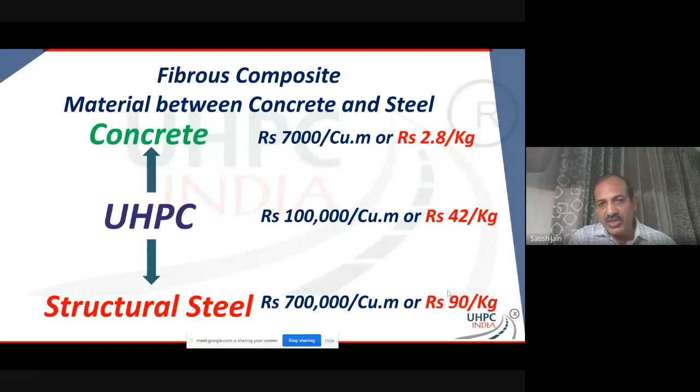So now we'll move forward because I wanted the team here present and listening to first grasp these numbers and understand them. I could have gone ahead and left it out for the last slide, or left it to just answer later on, but then the perspective is just lost. I can talk all good about UHPC, but let's bring this money perspective up front, which will allow us to see how we're going to use UHPC.

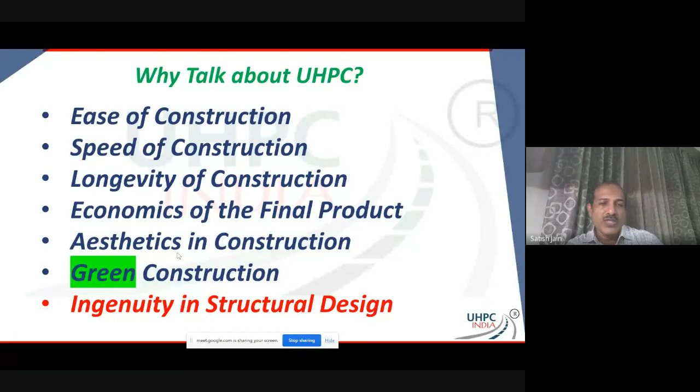So here it is - the material itself is powder, powder, powder, just a mix of powders. You're going to be using cement, you're going to be using pozzolans, something like microsilica, and you're going to be using fine sand. You are not going to be using coarse aggregate at all when it comes to construction grade UHPC, right? So it's going to be a powder material, looks very fine, plus a huge amount of steel fibers.

So the steel fibers are going to be about 2% by volume, and just to give it some perspective, that is about 156 kilograms a cubic meter. Look at the size of the fibers - about 0.2mm by 13mm length. So they are very, very fine, and there are lakhs and lakhs of fibers in 1 cubic meter. Another thing shown down below is, well, it flows very nicely. In fact, I have a video, and I am going to play that video for you.

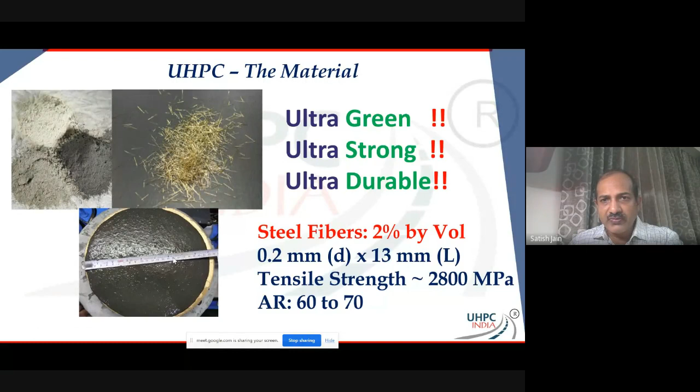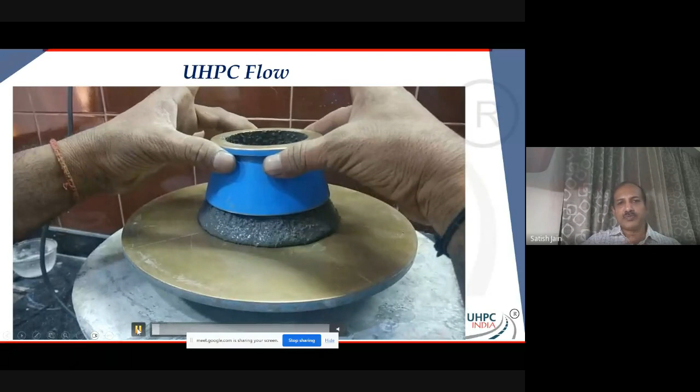So there's the video. I'm just going to tone down the volume, and I'm going to show you this. See, this is a small flow test. You're not going to use a huge cone to test out UHPC flow.

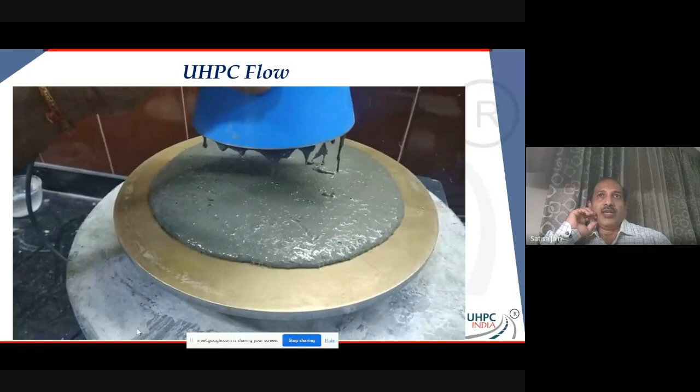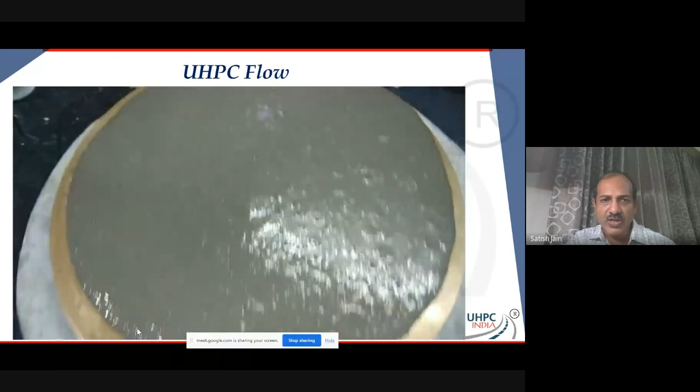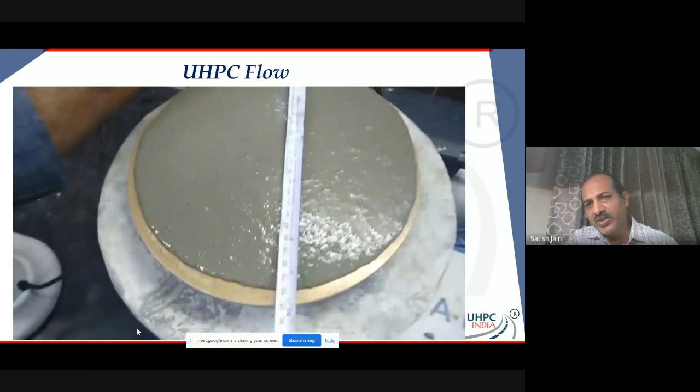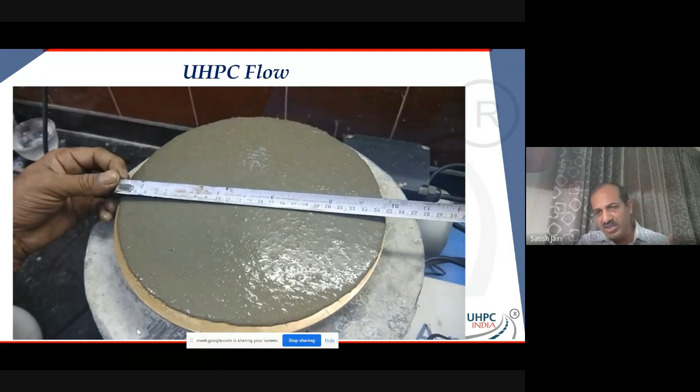There's another UHPC that is used, and we are going to come to that. That's called UHPC overlay, where you need a little bit of a thixotropic mix, which just doesn't flow off. It is workable, but just doesn't flow off. So we'll come to that.

So to give you some ideas, on the left side I'm showing comparative compressive strengths in the range of 140 to 220 MPa. Why do I limit to 220 MPa? That's in general what you're going to get. You definitely can go to 250 also. There are certain ways and means that you can achieve 350 MPa, 400 MPa, but that is outside the realm of normal use of UHPC in construction. So that's about the compressive strength.

Elastic modulus, okay, very, very high, generally 50 gigapascals or 50,000 megapascals. Third thing, low creep coefficient, about one with normal curing. Concrete has a creep coefficient of 2, whereas UHPC you can get about 1.

So what's the advantage of these three things I just spoke about? When it comes to long span, you can put a whole lot of pre-stressing in it and still keep going longer, because the more the compressive strength, the more pre-stressing you can put in. Long spans have deflection related issues - that's where the elastic modulus helps, and also the low creep helps with the long-term deflections. So this is a great recipe for doing long span structures with UHPC. You can do a lot of short span also, but it's a great recipe to put pre-stressing in as well.

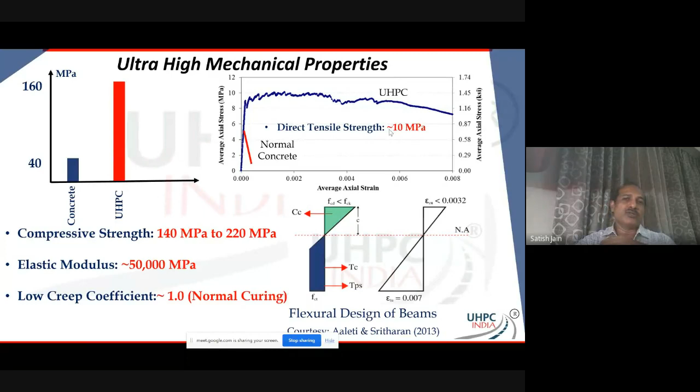Let me talk about why it is called performance. Why not just ultra high strength concrete, correct? It's called ultra high performance concrete because there are so many durability performance criteria that UHPC is great at, really great at.

Here is a quick example. Well, before I talk of the example, let's talk about longevity. We have a material here that can not only give you 100-year service life, it's possible to get 100-year maintenance-free service life. Just that changes the entire dynamics, because 100-year maintenance-free means you're not going to be spending any more money on your project. Once it's done, it's done. Yes, there's an early cost to it, probably, but over the life cycle, if it's a government bridge, nobody has to come and spend anything on it later on.

Let me compare this chart. You see this yellow line, this is concrete, and this is just a relative comparison. Green is high strength, high performance concrete. And blue, you can still see that's UHPC. That's how low the oxygen permeability is, or chloride ion penetration depth. Even water permeability is way too low. The corrosion rate is next to negligible. Carbonation depths are low. Even freeze thaw, for areas in colder regions, etc.

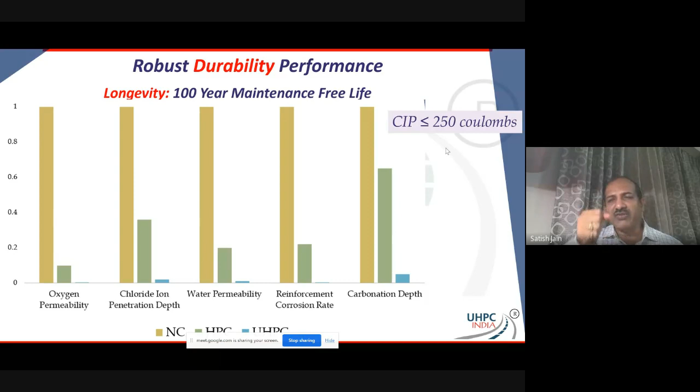And if I forget to tell you this later, concrete is brittle and explosive when you do a compression test on very, very high strength concrete. But UHPC, you no longer have that because of the presence of the steel fibers.

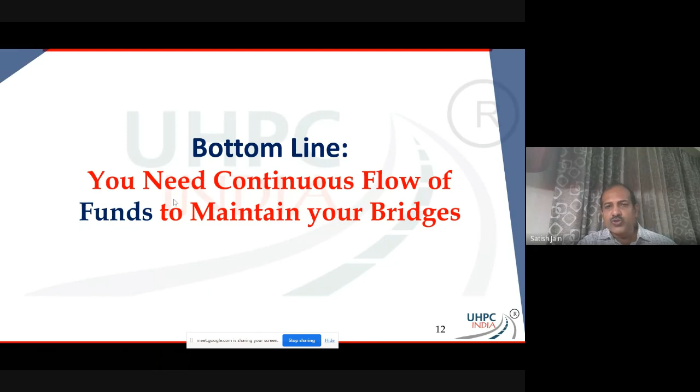What you need is a continuous flow of money to maintain your bridges. Let me give you an idea of what kind of money we are talking about in today's terms. You see, India right now has so many infrastructure projects going on. Look at this annual budget allocation for MORTH.

That number during last year was 1 lakh 18,000 crore rupees for the entire year, and that's for roads, bridges, running the entire administration, everything. Assume even 15% is going towards new bridges, that's about 17,000 or 18,000 crores, which means during the life cycle you're going to be spending twice, about 36,000 crore rupees every year. That's taxpayers' money, and that's just the MORTH budget I'm talking about.

States have their own budgets for highways and infrastructure projects. There's a huge amount of money going into rehabilitation, repair, or strengthening projects of infrastructure — the maintenance cycle I was talking about. You build something, it deteriorates, you strengthen it, it deteriorates again, you add load capacity, strengthen it more, it deteriorates again. UHPC, once you use it, is a one-time solution.

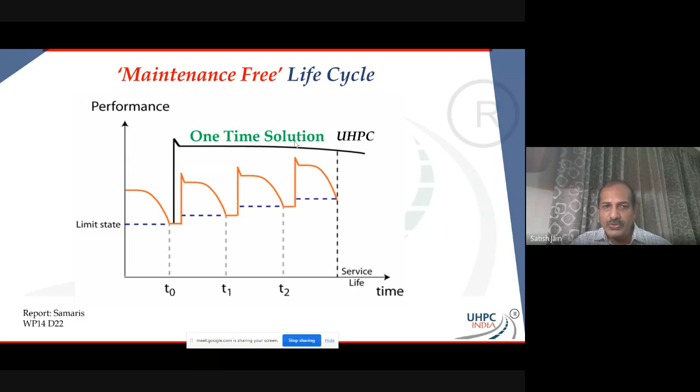As engineers, we need to understand it sometimes more than just asking for a direct cost and comparing it to regular concrete cost — UHPC delivers a lifelong solution. That's something we should keep in mind. And I was talking about architectural bridges, aesthetics in engineering, and UHPC can really deliver that.

This is a bridge in southern France, in Montpellier, and you can see such sleek columns or sleek piers coming out of UHPC. Even the girders are in UHPC. These are all precast, they just have post-tensioning within them, and it took just 4 months to complete.

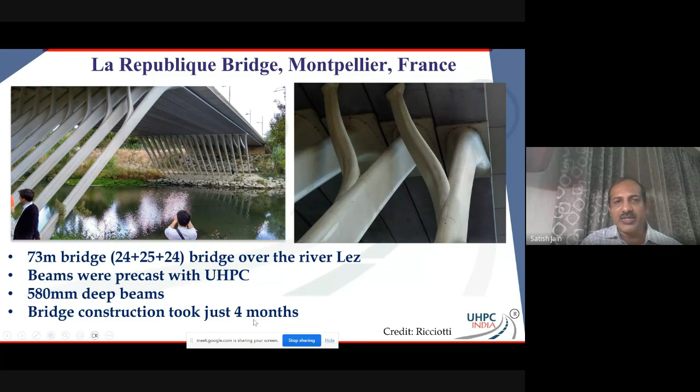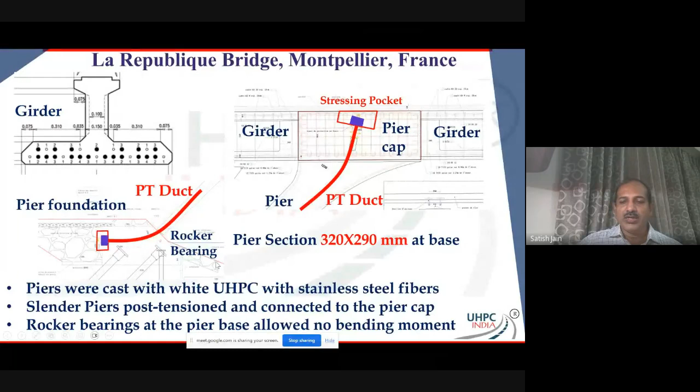The post-tensioning comes through and connects with the girder and pier cap. On the left side, that's how the girder looks — a nice inverted T girder connecting with the slab above. Right at the pier foundation, all you have is a rocker bearing connection. Simple, straightforward solutions that can be brought about with UHPC, and a beautiful solution as well.

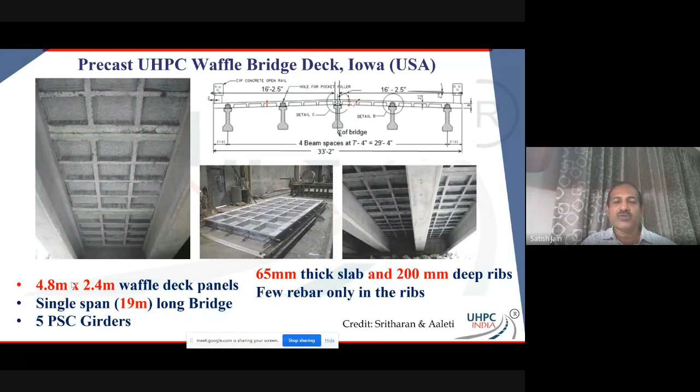Imagine, going back over here, how much lighter this is compared to your conventional 250 to 280 to 300 thick deck slabs that you're putting on top of your bridges. The reduction in weight is just about one third — it's just one third the weight of a typical deck. Your seismic weights come down in your construction, and one really has to think about those kinds of things if you're going to come up with sleeker solutions.

And while I talk about joints, let me tell you it's not just infrastructure — we can talk about buildings as well. This is of course a bridge project, and they have these precast decks on the right side where my mouse is. These are precast concrete decks, but they're all jointed together or stitched together using UHPC.

And UHPC is so strong that this joint is far superior to your parent element. You can see the face of the joint — on the left-hand side, you can see what a conventional joint would look like versus what a UHPC joint would look like.

The UHPC joints are sleeker just because of the robust characteristics of the material. To give you a general example, your bond strength between concrete and rebar needs about 40 to 50 times the diameter of rebar to develop it. In UHPC, you just need 15 times the bar diameter. That's how good the bond strength is, and so you get sleeker joints. You can come up with completely new construction techniques.

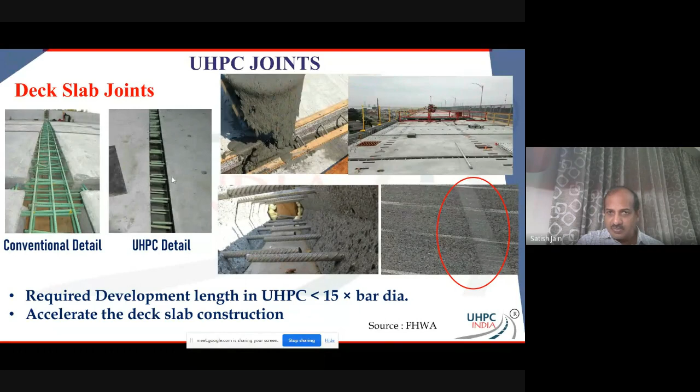Same thing with UHPC, prefab girders. How many times do we see that there are possibilities? There are possibilities. I'm not saying it can be done in every situation, but there are possibilities that certain segmental bridges could be converted, where a span could be divided into maybe 3 segments instead of having n number of segments. It's possible. Not every time, but it's possible.

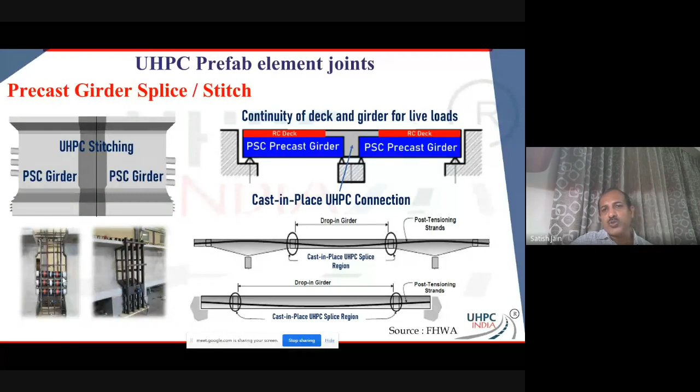And that's where you can again have a sleeker joint and use UHPC to join. And believe me, this has been seismically tested with cyclic loadings. Missouri S&T, a university in the US in the state of Missouri, is where full-scale testing of UHPC stitch joints have been done. So again, faster construction, less falsework, you can keep moving ahead. That's the beauty of UHPC.

Expansion joints - how many times do you have expansion joints? You need to have them. But water leaking through it, what's the problem? Everything rots. And what do you have at the end of the day? Your bearings deteriorate faster, and you need a maintenance solution.

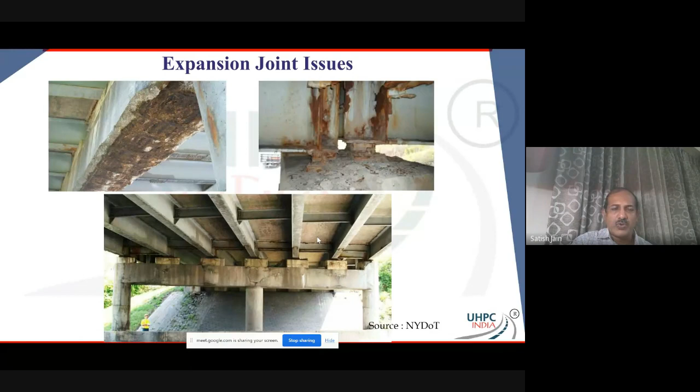So there's a great solution with UHPC. On the left side you see a conventional expansion joint. In the middle is a UHPC link slab, and what you will see is the lateral expansion is moved from the top to the bottom at the bearings, and the rotation that happens at the bearings is moved to the top, where the UHPC is - a little link slab that is put, partial jointed. That's where UHPC is put, so that's where the rotation happens.

UHPC has great ductility, so it has rotational capacity. So now you can appreciate the fact that there is no moisture or water penetration that can happen through your expansion joint. We are not saying we are eliminating the expansion joint, we are just interchanging the mechanisms of rotation and translation by changing their locations. But then we are avoiding the water ingress. It's a very simple thing that can be done on projects.

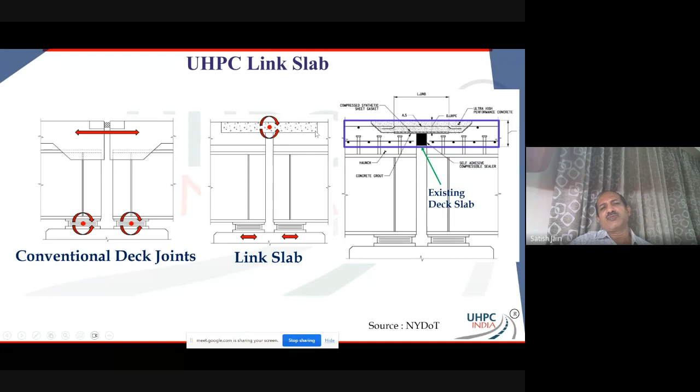Rapid strength gain - just to bring this to perspective, there's no one kind of UHPC. You can make several kinds, but one of the most common that gets sold has rapid strength development: in one day you get about 50 MPa plus, in 3 days you get 90 to 100 MPa, and there's so much you can do with that rapid strength development. You can open up traffic faster, get things moving really good. Bonding - excellent bonding, already spoke about it. Crack resistant, and of course strength - we already talked about it.

Advantages of using UHPC as a joint fill material, prefab elements again. This was one slide I was mentioning earlier, I will show it again. This is precast piles, happening a bit in Canada and US. UHPC precast piles are going down. I want to show you just one thing.

A UHPC precast pile weighs about 61 pounds per foot, whereas a steel pile is about 57 pounds. And believe me, steel H piles are preferred in the Midwest or central region of the US - they're just way faster. But the weights are so close together. And what did I tell you about the cost? UHPC is half as costly per kilogram than structural steel. You see how much you could be saving now? Tremendous. Of course you're not saving 50% - you need formwork for your pile, you need to add some pre-stressing, etc. But definitely you can save about 20-25%. You are going to be saving.

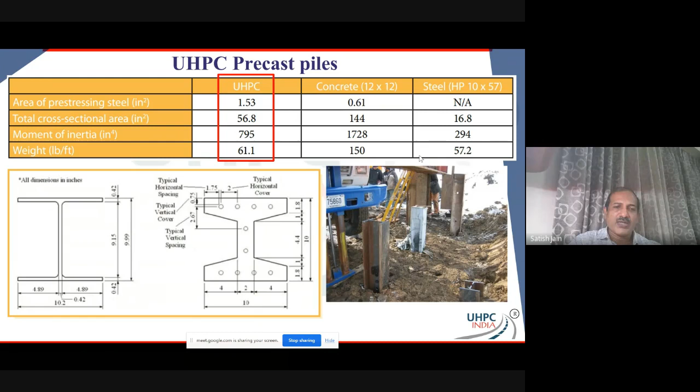That's a benefit that you bring about. Amazing UHPC. India, unfortunately, is a huge market for repair and strengthening. I say unfortunately because things are not lasting. Bridges are built for 80, 100 years and are falling apart in 15 years. You have to go ahead and strengthen them up. Similar is the case with buildings, unfortunately. So UHPC can come as a great boon, a great material for repair and rehab.

So the first example I'll talk about is this slide showing UHPC, also called UHPFRC, ultra high performance fiber reinforced composite or fiber reinforced concrete. On the left side, a simple layer, maybe about 40mm, of UHPC is put over the top of a bridge deck. This can be put on new decks, or existing decks. Once you do that, you're not only arresting moisture intrusion and safeguarding the concrete below, but the material itself is so highly abrasion resistant that you may not need any kind of wearing coat. That's the beauty of UHPC.

This is a very general example. You see it's a nice roughening process. I'll talk about the roughening process a bit, but you need a pretty good roughening process. On the right side, you may or may not require rebar, but this is a typical strengthening project where even rebar has been put. I think the left side was about 30mm in this project, and the right side was about 50mm or so of UHPC. This is reinforced UHPC used for strengthening one of the bridges in Switzerland.

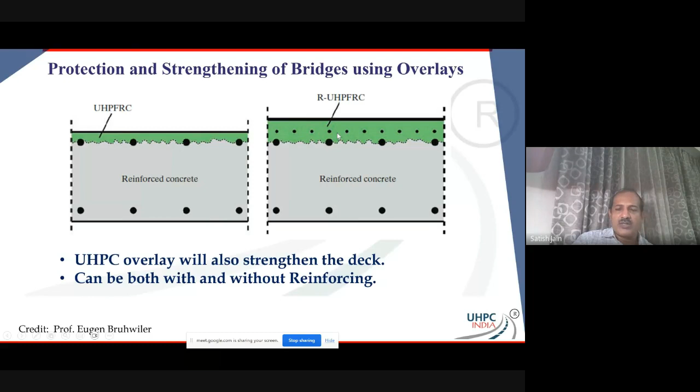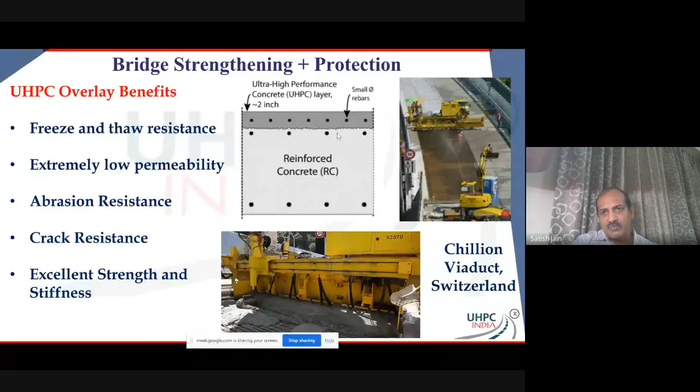It's a viaduct in Switzerland, the Chillon viaduct, where a couple of inches of UHPC was put in. So you get advantages in terms of freeze and thaw resistance, very low permeability, abrasion resistance, crack resistance, and excellent strength and stiffness. You name it, it's there. You just get excellent behavior throughout the life cycle.

Here is something that I saw in person. This was in 2019 in Albany, New York. UHPC is just mixed on site in a bit of a high energy pan mixer. So it's not just a simple pan mixer, there's a bit of a high energy pan mixer that they've used.

See the roughening process, this underlying concrete was roughened so nicely. You could use hydrodemolition, or a combination of milling and hydrodemolition. But you need a good roughened surface for good bonding purposes. This was a simple project, so a very simple truss screed vibrator was used. Immediately after putting that, they are spraying a curing compound after screeding it, so that evaporation can be arrested.

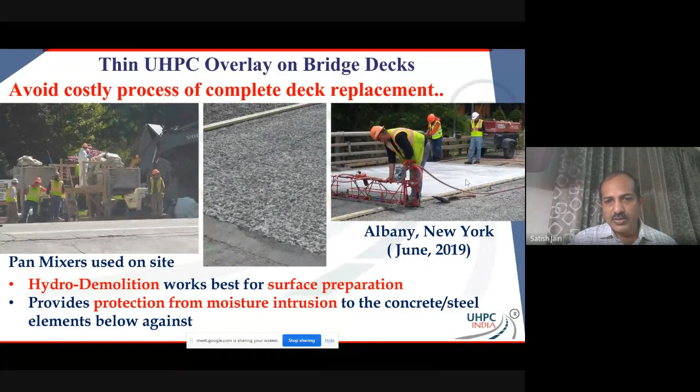I can attest to that, because UHPC as such started out in Europe, Denmark really speaking, and then the French took over, made a lot of UHPC, spread it around the world. It came to US and Canada, and of course Europe, Germany, Switzerland and other countries were using it. On the other side of the world, Japan picked up very nicely, Australia picked up, Malaysia picked up, China being one of the last countries, maybe about 7-8 years ago they picked up. Today China is the biggest both manufacturer and also the biggest user of UHPC combined, everybody in the world. That's how fast they've grown in the use of UHPC.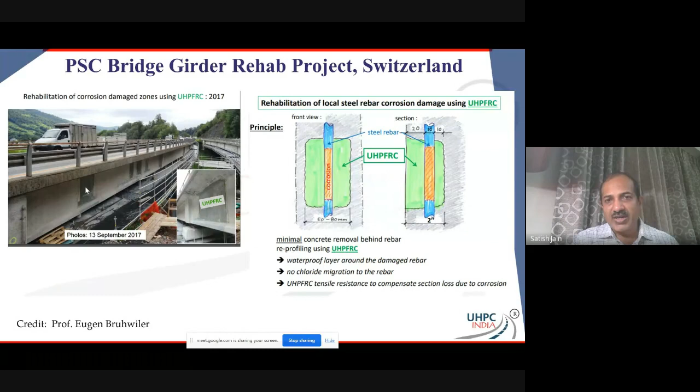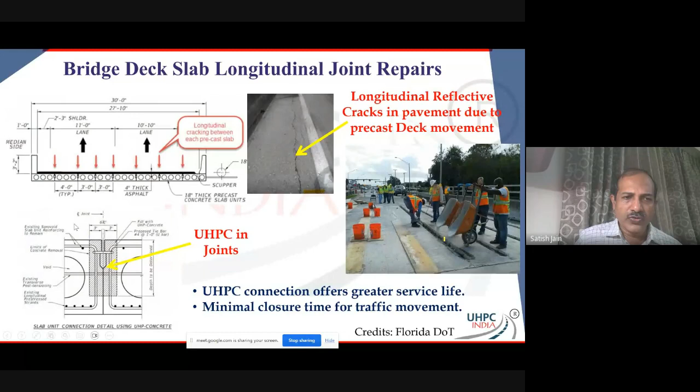More repair examples: these are precast segments placed right next to each other for a deck, with a wearing coat on top. Moisture intrusion through that coat started creating problems to the concrete below. All they did was open up these joints, as you can see on the right hand side, and poured UHPC into them. A simple solution. This was in Florida.

This is a Venezuelan project where marine piles were repaired using UHPC, just a jacket around them, called it good.

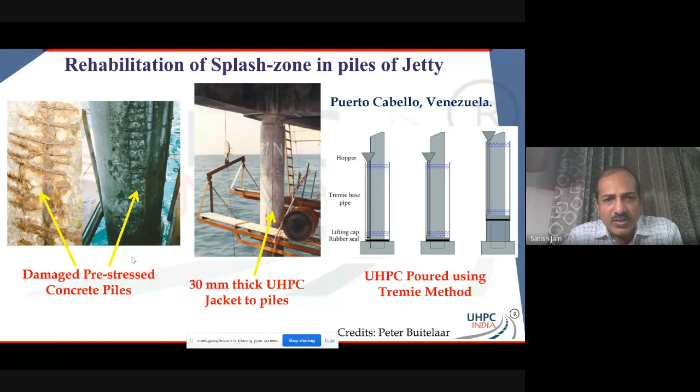This is Canada, where they used UHPC for a 100mm cover on a railway bridge. In fact, there's another example of a railway bridge in Canada where they did seismic jacketing, seismic strengthening.

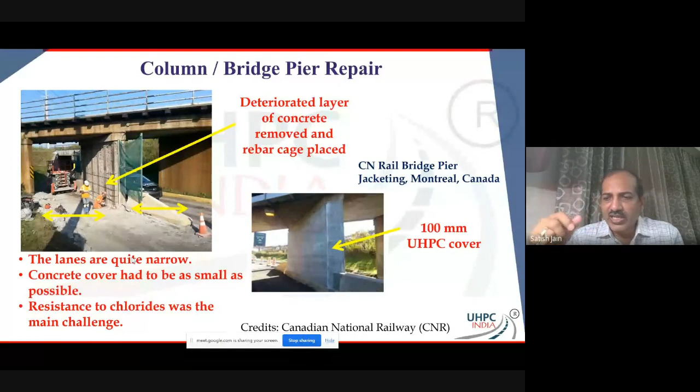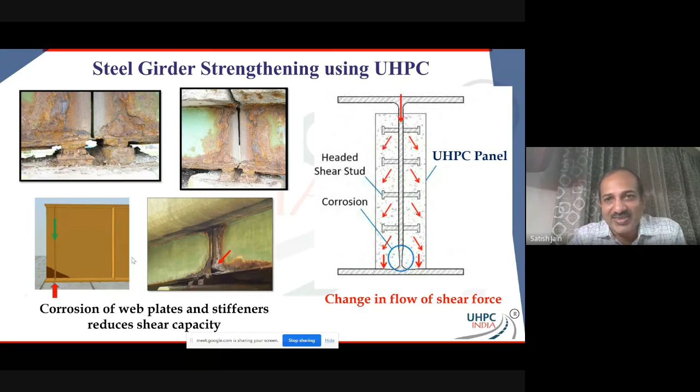You can increase punching shear capacities in slabs if there's reason to believe your flat slab isn't designed for punching shear, or needs additional strength. UHPC could be used to enhance it quite a bit. Steel girder strengthening could also be done by putting some UHPC at the ends, to take care of corroded portions.

One quick use of UHPC: let's say you have a normal concrete U girder with some poor consolidation or issue. This is again from Florida. You put UHPC in that area, and in a single day you get your 50-60 MPa. You're good to go, so it can be erected. There's no time lag - you're probably losing at max a day, but then things can be taken care of.

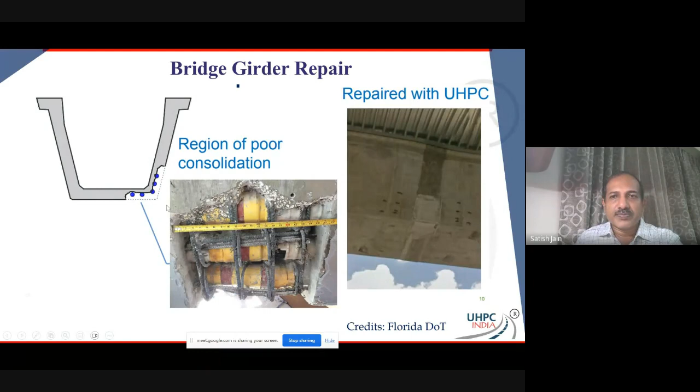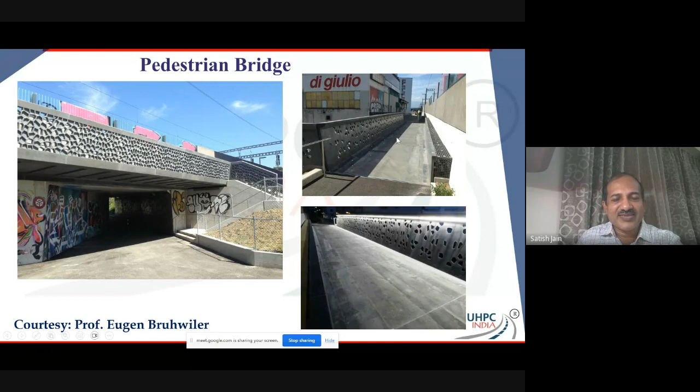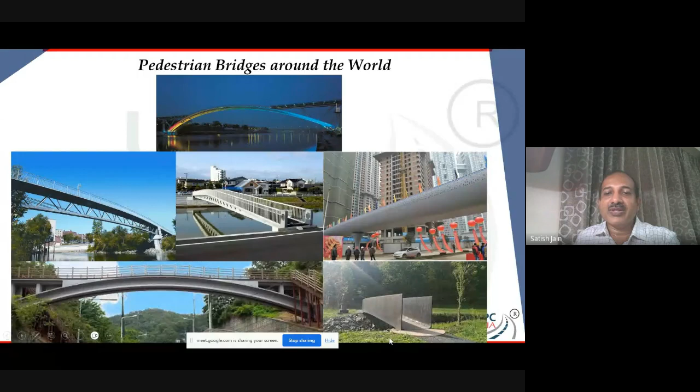It's pedestrian work, a different kind of work. This one is in Switzerland. More pedestrian bridges around the world, but let me tell you, if you go to the bottom right, that's one of my favorites. It's simple, just looks like a bent steel plate - that's what it looks like. You can come up with really nice and thin pedestrian bridges as well.

So we spoke about design shear strength - excellent, at least 10 MPa. Without rebar, you get 10 MPa design shear strength, so that's an amazing thing. Most of the time, for the girders you'll be doing, 90% of the time you're not going to be using any shear rebar. There may be some right at the ends, but otherwise you won't need it.

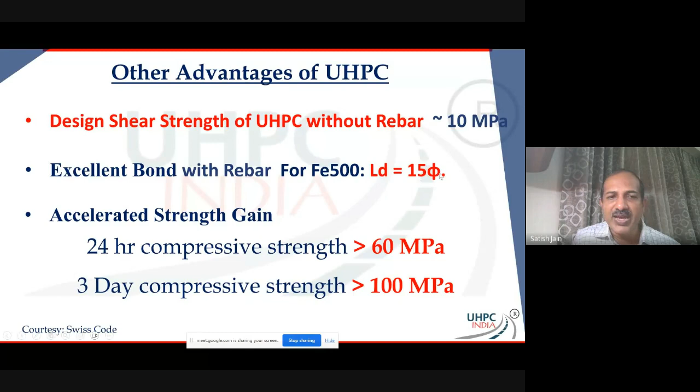We already spoke about the bond strength, which gives a development length of just about 15 times the diameter. We also spoke about 24-hour and 3-day strengths.

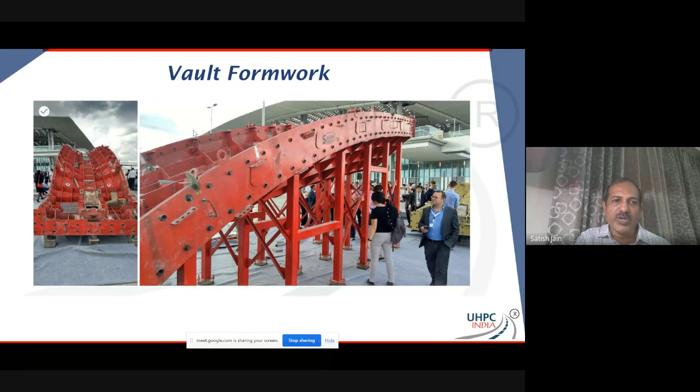I'm going to show you some architectural masterpieces as well. This is a railway station in Montpellier, France - very nice, you can see long cantilevers. That entire roof is made of UHPC, all precast UHPC pieces. That's the formwork - beautiful formwork, wonderful work done by the engineer who made it. Nice vaults were made out of UHPC for this project.

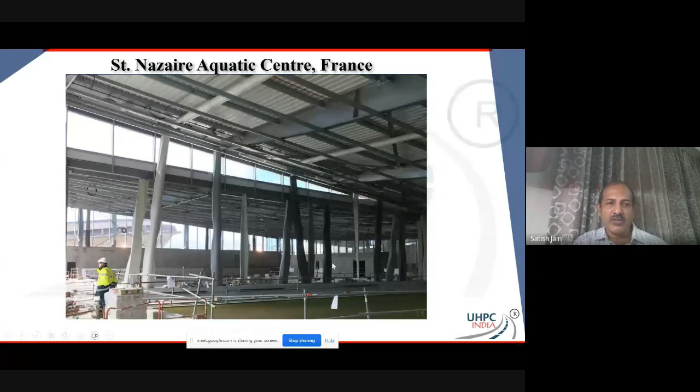Columns, designer columns - you can see all those columns standing up, very nice designer columns, all post-tensioned and connected to the steel roof and the foundation below. In this project, only the columns were made of UHPC. Nice balconies too - stepped staircases and these very nice shaped balconies that could just be brought in and fixed to the project.

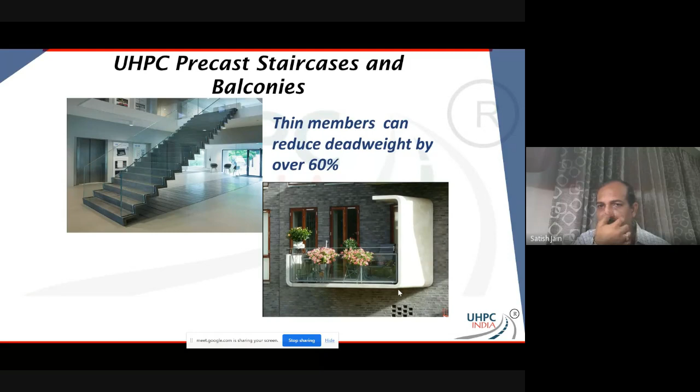It was just wonderful. So, a few things, we want to talk about busting myths. There's a lot of wrong information spreading around, and I think we should shed some light on it. Number one, okay.

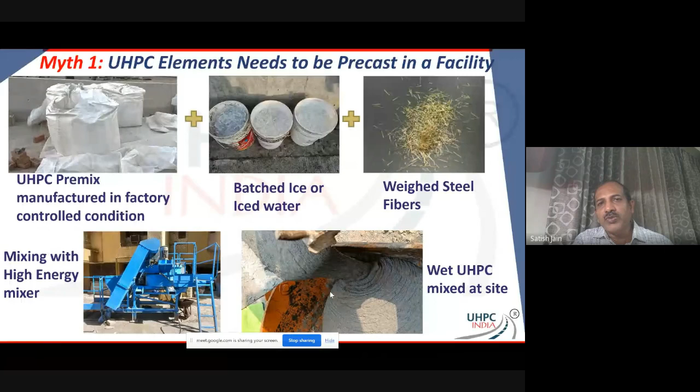I hear people saying that UHPC can only be done in a precast facility. Oh no, 90% of the work around the world with UHPC is done on the site, and it's just made on the site. You probably have UHPC premixes coming in, small bags, big bags, whatever. You're going to have an ice batcher, or you can just weigh your ice, steel fibers, and some kind of a decent mixer. You can mix on site, you can pour it on site. That's how easy it is. So no, it's not necessary that UHPC elements have to be precast off-site. You can even precast it on site.

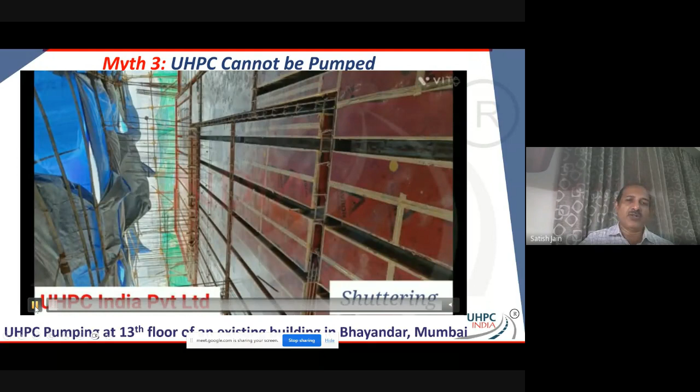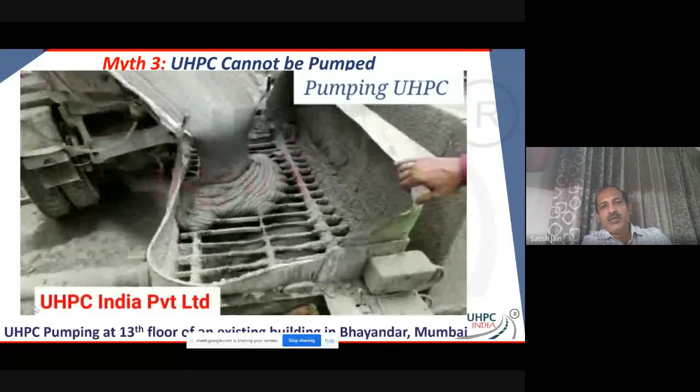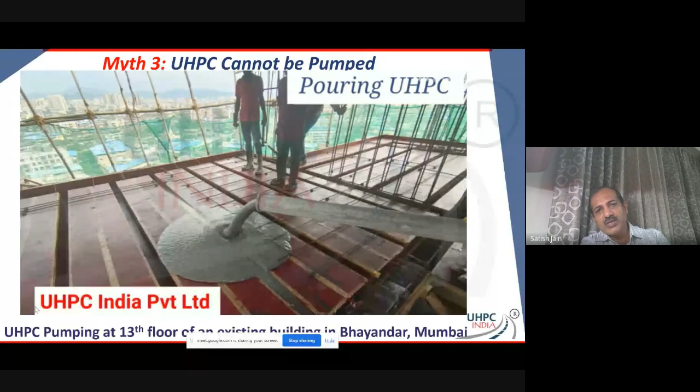And I'm going to show you a video over here where UHPC has been pumped. This is a joisted, ribbed deck on the 13th and 14th level on top of a building in Mumbai. These floors were added. UHPC here was actually mixed in a transit mixer, not coming out from a plant. The bags were put in, it was mixed, and it just flows out very nicely into a pump, and you see it has come out. You can see that in the video over here.

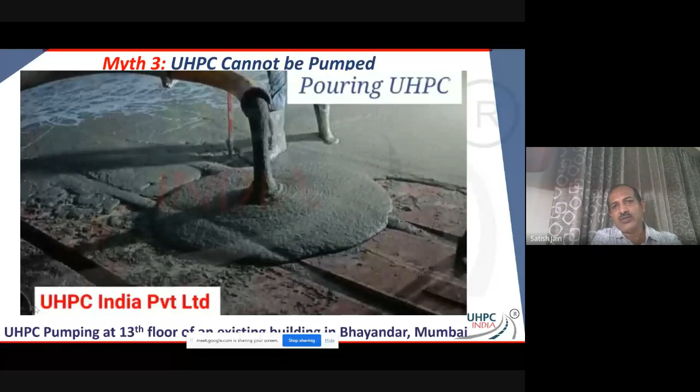The temperatures are low, about 25, 26 degrees Celsius. It's just so nicely coming out. You can imagine this UHPC has a huge amount of steel fibers in it, the microfine steel fibers, and it's still flowing out consistently. That's how beautiful it is. You just don't have to do anything.

Right? That's at the end of the day. Yeah.

And then there is another myth saying that UHPC has to be steam cured. Again, I'll tell you, 90%, 95% of the UHPC, there is no need to steam cure it. You can just use your normal curing, you can use your curing compound. On the left side, you see these small UHPC beams, about 8.5 meters long. For 30 days continuously UHPC was poured, about 84 beams were put together, and you can see the strength that was achieved. We took cubes every day: site mixing, normal water curing, about mean strength of 186 MPa with a standard deviation of about 8 MPa.

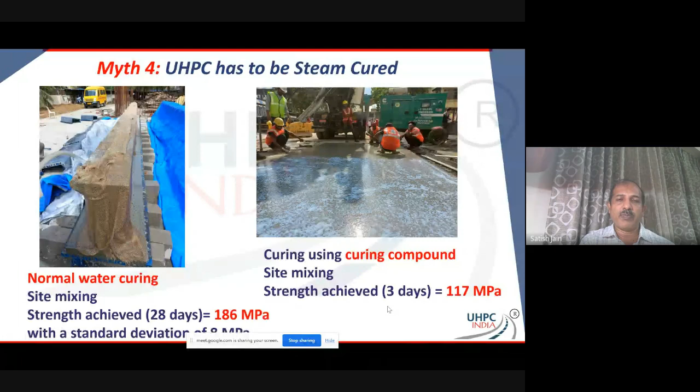And the right side material was used for a bit of an overlay near a station in Mumbai. Again, 3-day strength achieved was about 117 MPa on this particular project. So you can make UHPC.

Another myth is that you have to pour UHPC within 10 minutes, 20 minutes, 30 minutes. No. You can devise your own UHPC. You can have it workable for a long time.

Just excuse me one second, I got to put this medicine in my eye.

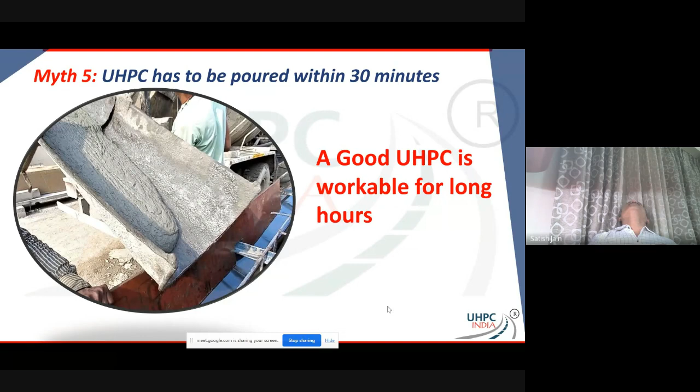And so UHPC, you just need what? You need retention admixtures. You can retain your UHPC as long as you want, 2 hours, 4 hours, 6 hours. It's up to you, what you're devising, correct? So all that's possible, all that's really possible.

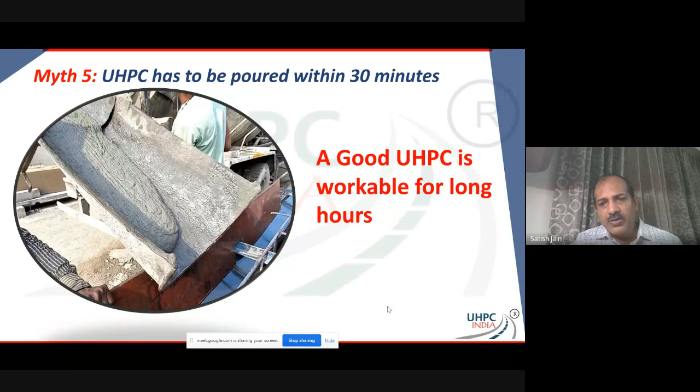So these kinds of myths or misinformation that's spread around, one has to understand that at the end of the day, it is a material. Yes, the quality control has to be high, but it is still a material which you can play with and create your own.

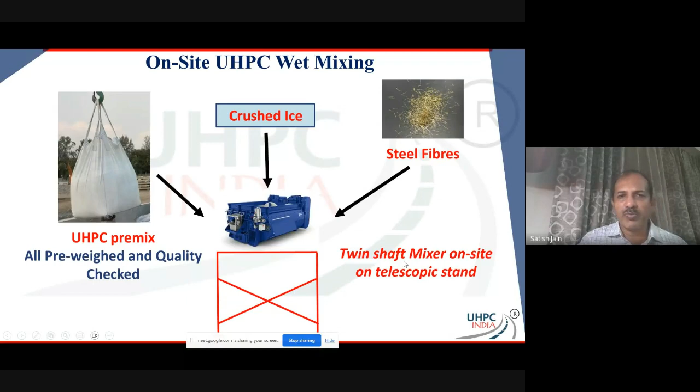On the construction side, I just want to show one little slide over here, that on a job site, if you're getting a jumbo bag, you just have a mixer that needs to be put on top of a telescopic stand. You put crushed ice on it and add the steel fibers, and then you can have a bucket down below, or a pump down below through which UHPC can be moved into wherever it needs to be placed. So on site, it could be a very, very simple mechanism. There it shows, the bucket's there, and the bucket will take it to the beam and just pour it into the beam.

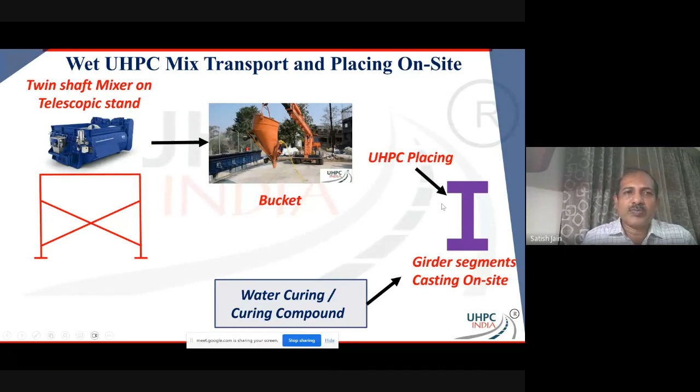So I'll just show you some other things. This project I wanted to talk to you about specifically. I showed this project up front, but let's look at what the owner wanted, what was the problem that we solved using UHPC on this project.

This was a school that was put together, and the spans were about 7 meters. There were two spans of 7 meters, total 14 meters. When it reached the top story, the owner called us and said that at the top they wanted a 14-meter span. Now it was just a 2 to 3 story building. The structural engineer said I cannot have huge spans because it will increase the load on my exterior columns, since the columns were just designed for a small building. The column doesn't have the capacity to carry a lot more, the foundations don't have the capacity to carry a lot more. And they wanted the roof to be in concrete as well, because they wanted to hold dinners and other activities at the terrace level. So it wasn't like you could just put a metal deck with a steel truss and call it good - it had to be concrete.

So we came up with an idea of this kind of inverted T, a little bit of an I-beam, very thin. This was post-tensioned, 14 meters long, and you wouldn't believe it - the total weight was down by 30% compared to the original two spans of 7 meters. The weight on the end columns came down by 30% by using this UHPC solution.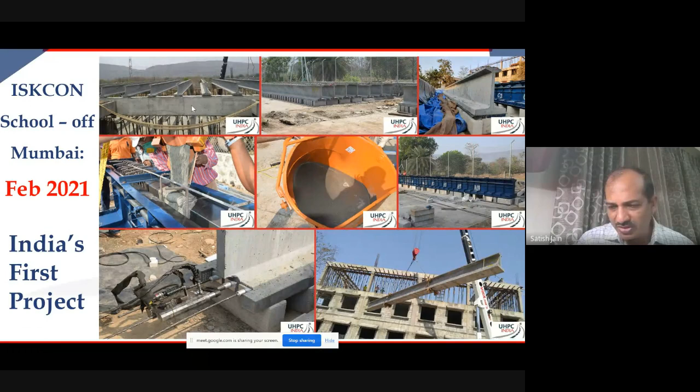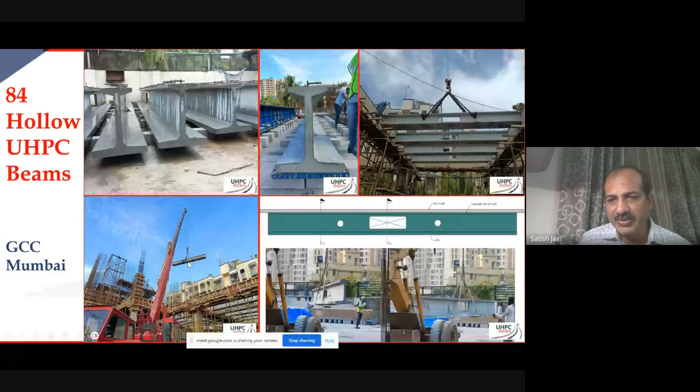There's another project wherein hollow UHPC beams were made, and that was more for the HVAC units, the heating and ventilation, air conditioning units. So there was some extra design work that went into that because of putting the openings in. Sprinkler lines were put in, and here too you can see one of the first floor beams being picked up very nicely - around 84 beams were cast for that project.

I'll just show you some of them. This is the 19-meter span. This was cast in place at the 13th level, so casting was done very easily. The UHPC in this case was just mixed, put into wheelbarrows, and through the construction lift it went all the way up. There were like 7 or 8 wheelbarrows in line, just going up, coming down, going up, coming down, poured with wheelbarrows - your regular construction means and methods.

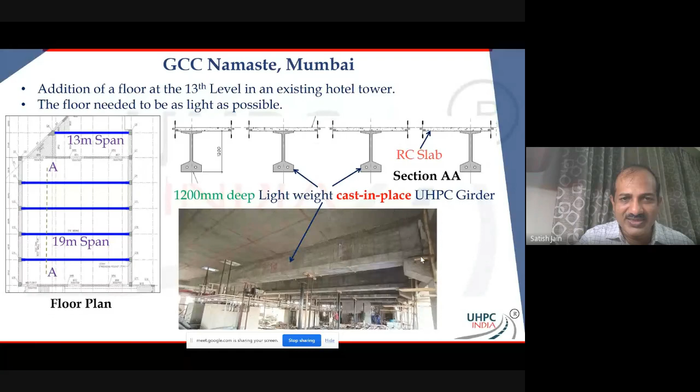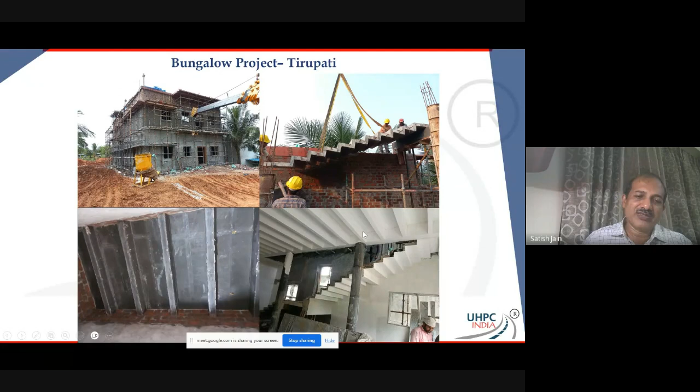I'll show you this as well. Here's a project where the owner is a hotelier, and there's a 12-story building coming up. But the first story, the ground floor, is a banquet hall, and they wanted to open it up last October, 2022, for the wedding season, and they were already late. The banquet hall has a 9-meter height - pretty high - and huge spans, 16-meter spans. So if you're going to do your regular false work, shuttering, propping, and then putting concrete and post-tensioning it up right at the top, they were not going to meet the schedule.

So we brought in a thought process. We said, what if we have precast UHPC beams, precast on your site, and also we precast the RC slabs, 4 meters by 5 meters pieces, on the ground, and then we pull them all up and put it together and stitch it together with UHPC? I'm just going to show you this and narrate it as it goes.

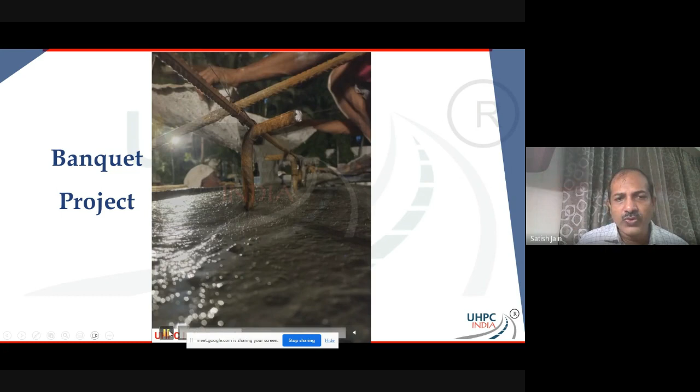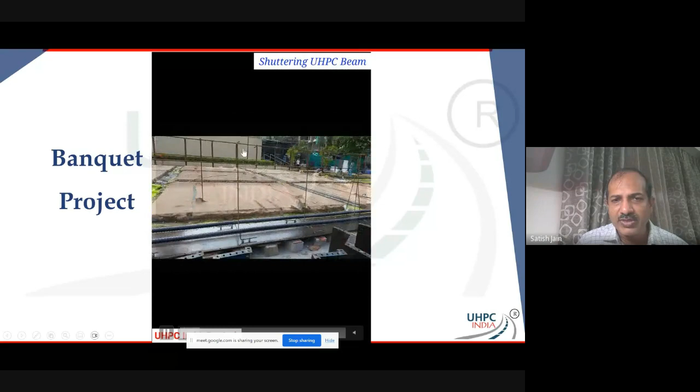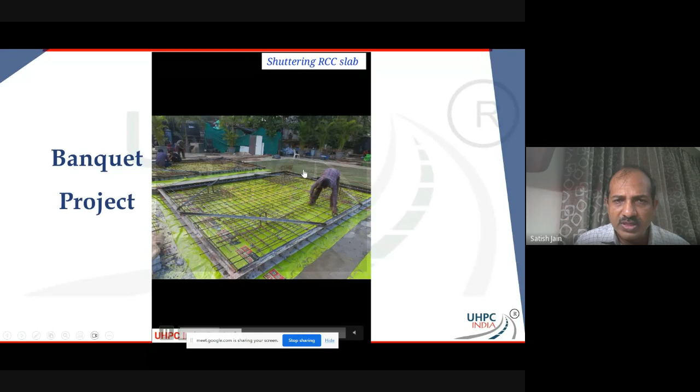So this is the beam that is being put together. You see, hardly any rebar over there. For some composite action with the slab, there is rebar right at the top, and the post-tensioning ducts are here. That's the form work, and you can see the slabs - these are RC slabs, not UHPC slabs. Only the beams were UHPC.

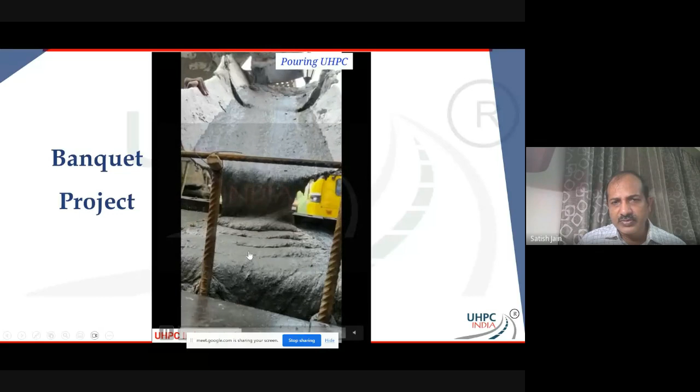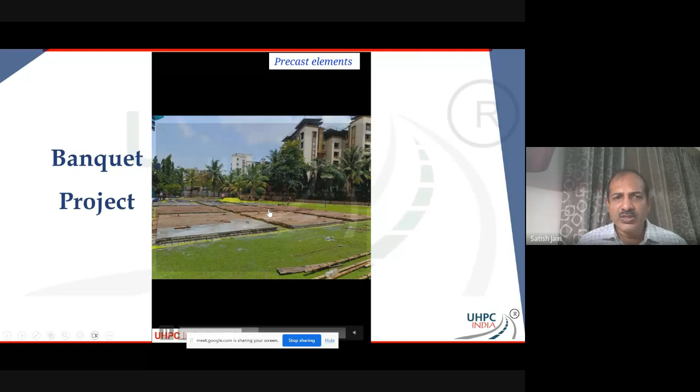That's of course the UHPC coming out of the truck again, and there's the concrete - a regular contractor doing it. We help the contractors understand what to do, what not to do with UHPC. You can see these slabs, and post-tensioning was done down below itself at the ground level. The beam was then pulled up, slabs were then pulled up one by one, and they were put together.

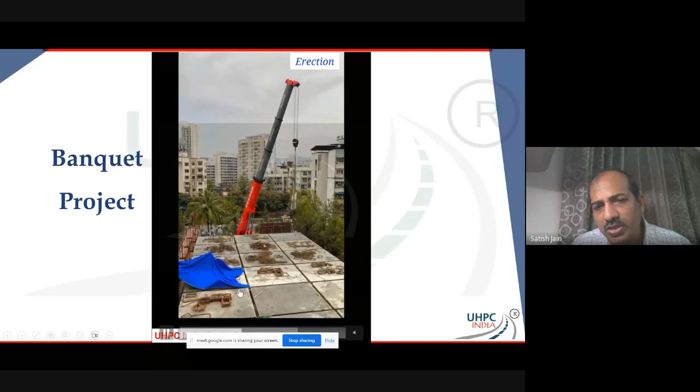And here's the icing on the cake - all this erection and the stitching was all done in only 2.5 days time.

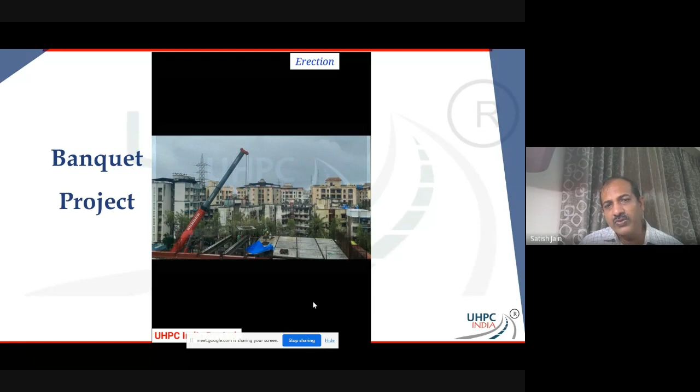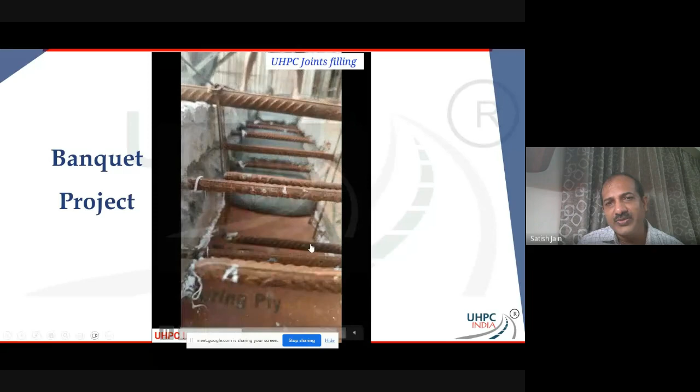The owner was able to open this banquet hall 7 days before he could complete all his interior work in time and open it up. So that's the joint that you see—that's the UHPC joint out there.

Looking forward, if you want to talk about it, look at UHPC to add value. Look at UHPC to solve problems. Also, you can look at UHPC as an alternate to structural steel.

We just solved a problem, and this project is coming up where 800mm by 1600mm columns—thick columns, gravity loaded columns in M80 concrete—we were able to replace with just 750 by 750 UHPC columns. There were 5 of these, and construction has just started on this one. Imagine 800 by 1600 columns of M80 replaced with 750 by 750 in a commercial building, in a department store.

That's adding value to the customers, to the owners, right? Gives you space, it also helps the structure. It reduces the space required, or increases usable space. Gives you something to look forward to. That's what I'm saying—the new generation of engineering possibilities is here.